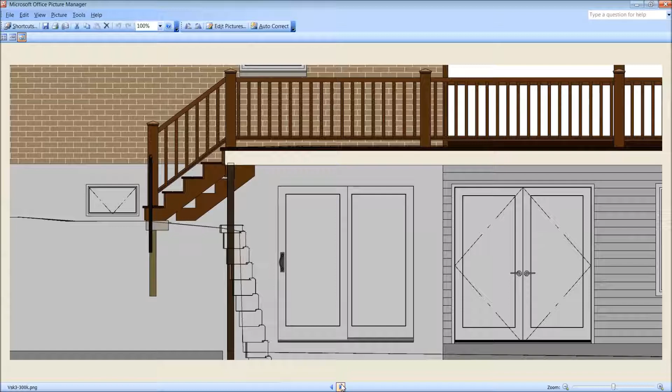But with the longer vanity, the 48-inch vanity, we ran into a problem. So the first thing I did was look at, can something happen to get that window in here? Really, it needs to move about 16 inches to make it possible. We need the stairs to move about 16 inches. It's doable. They can move over all the way there.

It becomes a little bit of a different environment underneath. It's doable because none of this isn't really going to be concrete here. All that concrete will be gone from the cut down. There will be some sort of coil stock or covering of the framing that's underneath, and there'll be a lintel above it to hold that brick up.

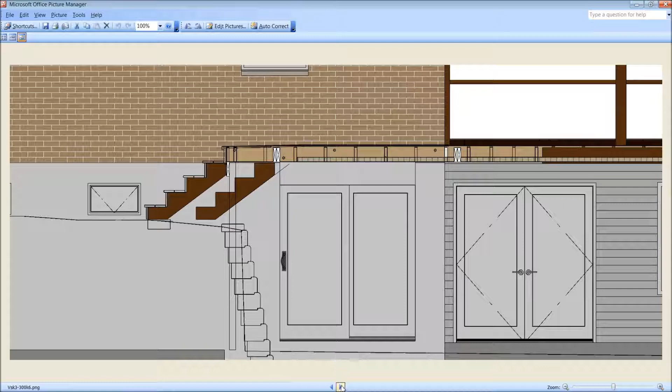So yeah, we could cantilever another beam. We've got a beam cantilever here to pick up the load from this column to there. So we could shift things around and send another cantilever beam through the floor and out to hold that up, and then the stairs come back here like that, and we can get a window into that room. The stairs come back, the sidewalk comes back with them.

However, before or after I did that, I said, okay, so it's doable in the event that the 5 foot or the 4 foot vanity is an absolute requirement. It is a doable thing without a terrible amount of headache. But first I wanted to see what could be done if we just left these stairs where they are, since that's all been set up already, and maybe if we can do something with this bathroom down here, we end up with a larger bedroom.

So that's the first thing I did, was took a look at what could be done with this bath here and keeping a window in place, keeping those stairs where they are. And we knew that the bed wasn't going to go on this side, it was going to go on this side like this.

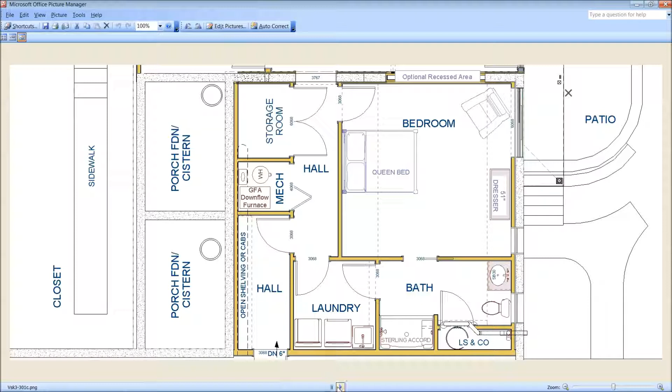So then to the bathroom, this was the best I could come up with while preserving that window space. You can see that wall actually shifts down a little south. So this was what I could come up with leaving this window in place, leaving the stairs in place. This is the arrangement I came up with up here with the closet here.

The closet becomes a little more narrow. I gave over some space for shelves or a linen cabinet back here in the laundry. I see no reason why the lift station can't fit in this space here. It fit in it before. It was really overdone, so I see no reason why it couldn't be there.

But it does, the largest vanity I can get in, because we've got a steel beam here and we want a little sink in the laundry room, the largest vanity I can get is 42, which is still a substantial vanity. The last one we looked at our last meeting was 48, so we lose 6 inches trading that off to leave these stairs where they are in place.

Leaving the window in place, and then this is the kind of floor plan we end up with. So the main decision is, can this bath floor plan work for you, and is this acceptable up here? And here's a closer up view of this little area.

I hadn't considered this at the time I did this review, but I'll put it together and stick it in here, then ignore it through the rest of the film. If you're willing to not have a full 5-foot wide shower, there are units out there only 54 inches wide, so you could pick up that 6 inches if you go down to a 54-inch wide shower. I'm showing this around 34 to 36 inches deep, but it can be a maximum of 44. So it turns out you can have the 48-inch vanity down here if you go with a shallower or less wide shower. I just wanted to put that in there so you know that fact exists, even though I don't mention it through the rest of the film.

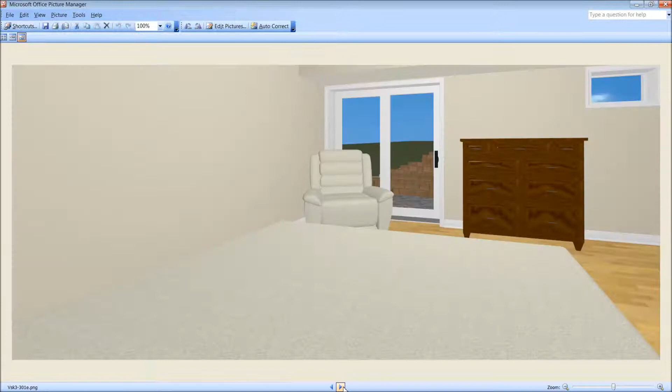Here are a couple of quick views: a person lying on the bed on this side, looking out the patio door, looking out the window. This doesn't get too encroaching. The window's not completely firmed up there, you can see I got an edge, but it actually gets bigger than that.

Anyway, I think this is a fairly decent plan. If you can get by with the 42-inch vanity, I think it's probably the way to go, so we don't have a bunch of horsing around here. This remains fairly straightforward.

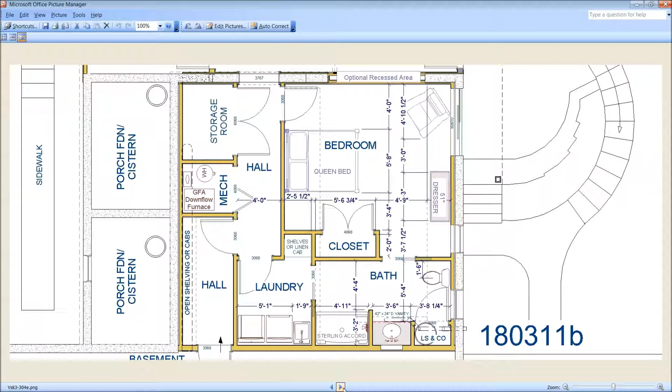The next thing that comes up with this particular plan, here it is dimensioned. I wanted to review with you, since we talked about having it fairly accessible with all 3-foot doors everywhere, we've got the 5-foot turning radius well within realm here, even once we shift this wall a little to make this door clear, so you don't have to pull the tank every time to get into this mechanical room. But in terms of fully complying with ADA guidelines, they're calling for a 42-inch towel bar or grab bar on the left side of the toilet, coming out at 56 inches.

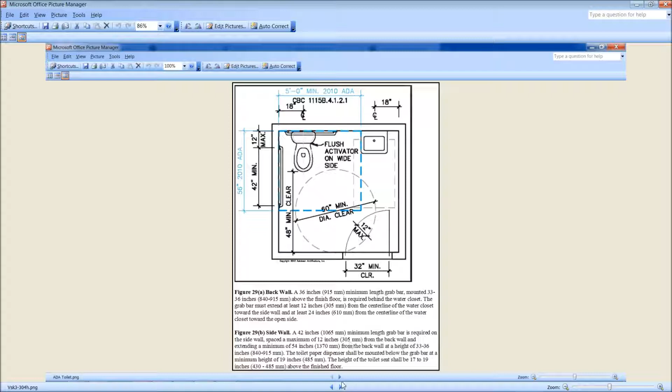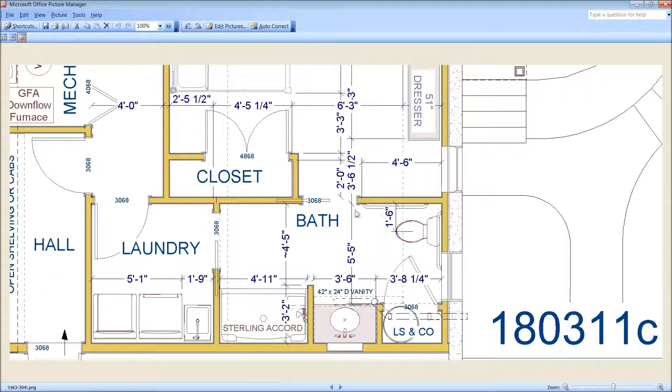You can see if we do that, it requires shifting this closet way back. You see how that is. To get this 42-inch ADA requirement for the grab bar, we've got to shift that closet door. I don't like that it comes under this soffit here, but if that's really critical, then that's what would have to happen. Whether this just gets divided with a little broom closet from this side, I don't like this door coming under this soffit like this. I don't like that detail, but if this is critical, that's the price to pay for keeping this window, keeping these stairs, and having this 42-inch grab bar on the left side of the toilet.

This is a little bigger overview. Just looking at these doors, something like this maybe would be better. Otherwise we leave it like it was, and you end up with about a 34-inch bar on the left side of the toilet, and you preserve the shelves and linen cabinet. You preserve this door, keeping it out from underneath that soffit environment. It's still a pretty decent bath.

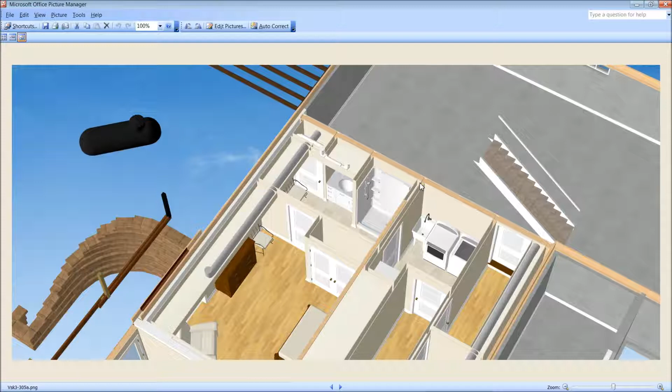Here's an overview of that particular bath. There's the closet, the door into the mechanical room, there's the 42-inch vanity, the shower is here. The shower head has to be on this side because this is a pocket door going back here. You can see a slight bit of that soffit intrudes into the shower, but it's nothing really. Here's another view from this side, showing the angle even with the little nightstands in place. From this side, the soffits aren't in place, so you can see all the piping, but if the soffits are there, it's something like this.

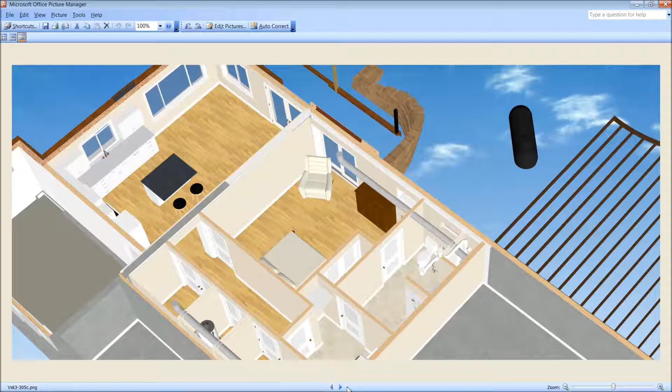I'm sorry to belabor this point, I just want to be thorough, and this is a fairly big undertaking. I want to make sure you have what you want at the end. So I want to revisit these stairs, and I really got carried away, so bear with me and try to stay with it.

This was the last, leaving all of this alone now, assuming this 42-inch vanity works. If you want the larger grab bar, the shift has to happen up here that we talked about. But returning to just the patio and the walls, you had liked these curved modular brick Allen block units coming around here, and this was where we had shown that, so I wanted to take a look at that.

I'm concerned about, or one of the things I want to review, is how quickly someone gets from up here down to down here, and the linkage between down here and up here.

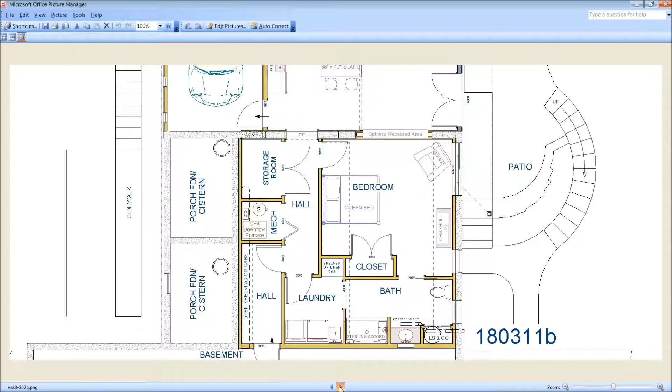At first I started just looking at this wall, and so, all things equal, I wondered if you weren't better with something like this. This bit here is the walls themselves, and then of course this is the stair. So I wondered if you wanted to think about something like this, whether that might work better. There's a bigger view of it here.

This is what we had looked at, and this is that one. It trims 2 or 3 feet off the travel path, but maybe it feels better down through here. I don't know, it's a personal judgment there.

And we are not finished with this whole area yet, sadly enough. But these were the two different looks I had at that time, at this point in my development. So this is what we looked at when I was there last Friday, and then this is the modification of that. Nothing much really, but something to consider.

And you would have, now I think that was the only rail that would be required—just the handrail, you wouldn't need a guard. All of the places where this becomes 30 inches high are going to be more than 3 feet from the walking path, so that's the only railing you would require. That was the only railing you were going to require here, was our belief.

But this is the next look, something like that. It's probably the same amount of Allen block, same amount of work, a little more stair forming, but they're already into a curve here. And whether those—that could be any number of things, it doesn't have to be concrete stairs.

So yeah, there's the required guard. Maybe that wall doesn't get so clogged up there and just comes back here, and you have potted geraniums or something in this corner. So this was what we looked at on Friday, and this is the modification of that.

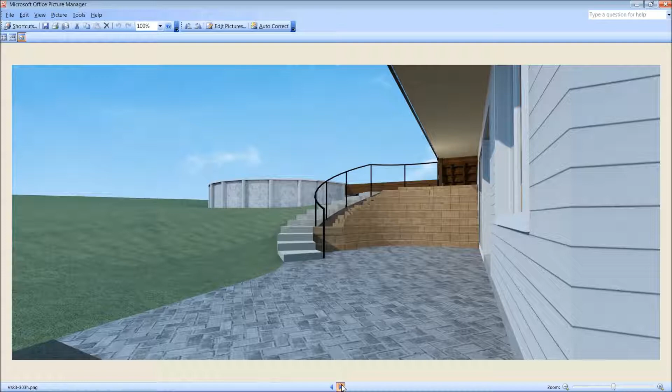Next, though, as promised, I was not finished with this whole area, because after I was out and met your mom, your mother-in-law, I began to wonder, not just for the immediate and foreseeable future, but for the long-term future, for the value of the estate, etc., whether we wanted to look at a better linkage between this outdoor area up here and the rear door and this lower living area here, which becomes a really viable apartment type environment.

So how close do we want to link this area with this upper area? I know that we have access in here through the stairs, etc., but I wanted to make sure we were set and sure on that once we got ready to put the money into this whole endeavor. So it was a case of do we want these stairs getting even more linked with this environment down here, so that there's a quicker path from either of these places up to this outdoor living space, up to this rear door out here, etc.

Originally I was thinking of just a little cute stairs curving down there. It wasn't really possible to do that, because if I get a stair down here, do we maintain a stair up here? This next review just looks at having one set of stairs going straight down to this patio environment as quickly as possible. So the first thing I did was look at that—what is the quickest, shortest pathway, which would be right up beside these stairs here.

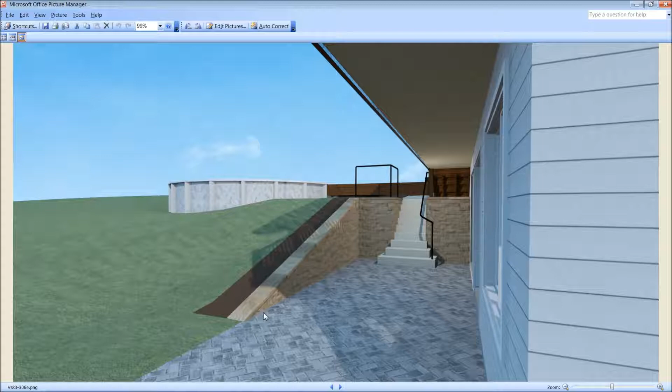So going this way and this way is the simplest type of stair down. This is probably, and these walls can still be that Allen block, for that matter. I mean, this comes out a little further when it's Allen block, but these could actually all be Allen block instead of concrete with veneer, cultured stone veneer.

I'm just showing it that way, and this is really a review of, do we want stairs right down to the patio? So it's something you have to think about and weigh your options and what matters, etc. And I know this is long and arduous, but it's a substantial investment, so you ought to have it right.

So that was the next simple stairs, and this is something like this. Absolute requirement of the handrail here. It actually could stop right here if you really didn't want handrails at all, but I think it's probably advisable to at least have it come down to the bottom of the stairs for the long-term future, etc.

Obviously, I don't show stairs out here, so the people are going to travel across this patio and then up these stairs in this permutation. There's some additional bars. I think that one's probably not required.

They say within 3 feet of the walking path, and this is probably closer to 3.5 or 4 feet to the edge. But considering the pathways here, I think it's probably advisable to at least have some sort of guards here. And those are not the 4-inch sphere guards, they're just enough to stop people, including toddlers, from coming off and over that edge. Whether that one is there or whether that comes all the way down, it's just personal, probably not required.

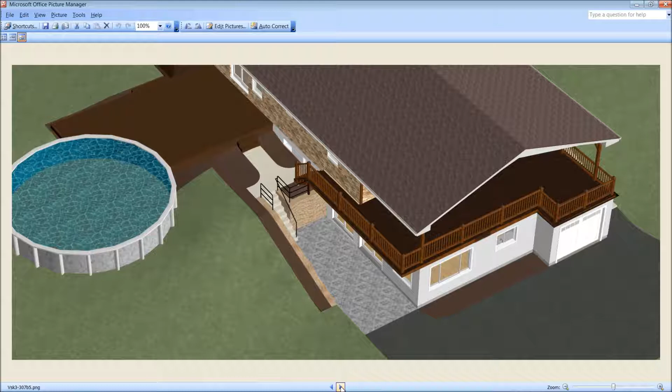And then here it is from down here with the bars in place. So that's the minimal kind of stairs to get down there.

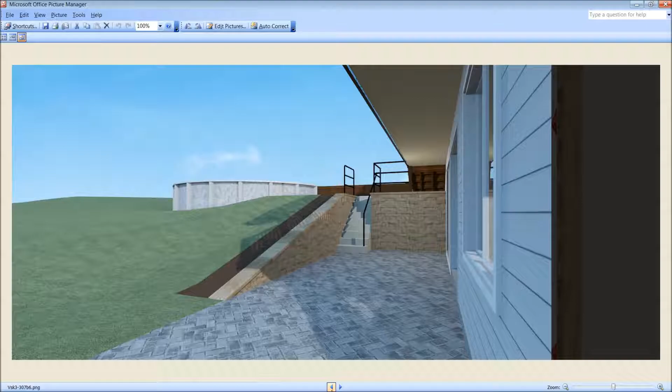Next though, as I said, not done yet. Next, I wanted to look at a little different thing, and really I built this after this next section, I just built this morning. But at first I had gone to a situation where you come down—I wanted to break up this 9 riser stair with a little flat section, but it really uses up a lot of the patio. I already put it together, though, so we'll continue to look at it all the way through.

So I put this together where you come down 7 steps across a landing and then down into a pedestal environment this way, where a person could get to it quickly, either from the car or from the door or from these doors. But you can see there's a little bit of a squeeze here if a car is parked there, and I have a feeling it might become a habit for someone.

So because that was so squeezy, I had something in mind when I started putting this together, and talked about it briefly at our last meeting. The first thing was to get rid of this pedestal type environment, so you can only enter from this end, as opposed to that short, simple stairs that came down right here, while travelers from this area are not cutting across her patio. If she wants to come up, she's got to come out here or out this door and then up. Still fairly straightforward.

Next, there are some retaining walls put along here because I have something in mind for getting a better view out here, for not having this big towering wall. So these are some additional retaining wall legs that come out here and hold the earth back on its way down, that slope down this way. And again, that squeeze by the car there is probably only 18 inches or something.

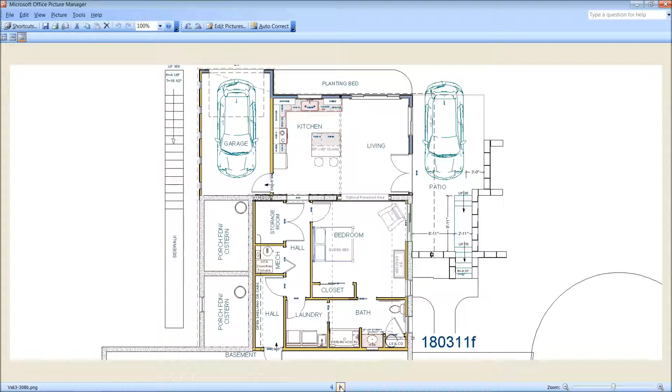Sorry to revisit this, but I want to make sure you know what you're getting and that you'll be satisfied down the road. So this is pulled back into a couple terraces, and now the view from this door, there are plantings up here. This wall here along the landing is 18 inches high, so it's actually a little seat, or there are potted geraniums - I'll stay with the stereotype.

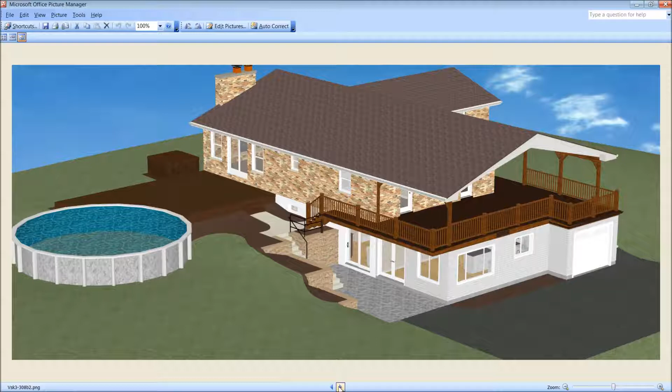And then this wall is pulled back some to allow for better parking here. I don't know what the expense is involved in this, as opposed to just the Allan block, where we had the Allan block wall here and a curve around here. I would just review all of this and see what appeals to you, and then we should probably draw what you would want ideally. If we have to break it back, then we have to break it back later.

But here it is from down here then, with these little 18-inch high walls here and here, and then planting areas here and here. Whether this bottom rail is there or not is really personal preference. You would require that much - I think that one's an absolute, regardless of what the code says. I think that one's an absolute.

This one, the fall is not too high for anyone really. This is only 30 inches here, so it's not required. It's actually not required here, so nothing is required - there's no handrail required on this whole side, because everything's kept within the code requirements.

Personally, I like this one. It's only 7 feet here, but it is isolated from that - that's really all I can say about it. Again, this could push out another foot if you thought that was a requirement. And that's it - finally, that is it.

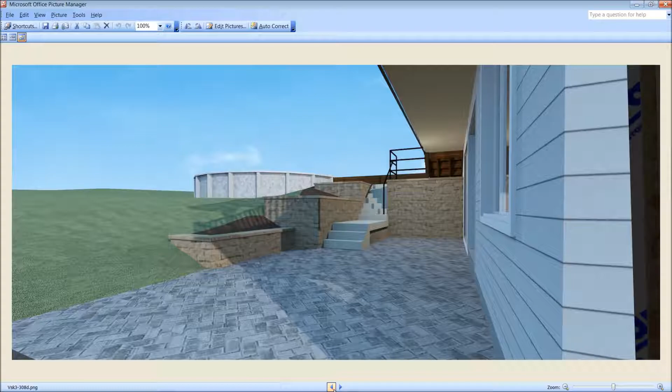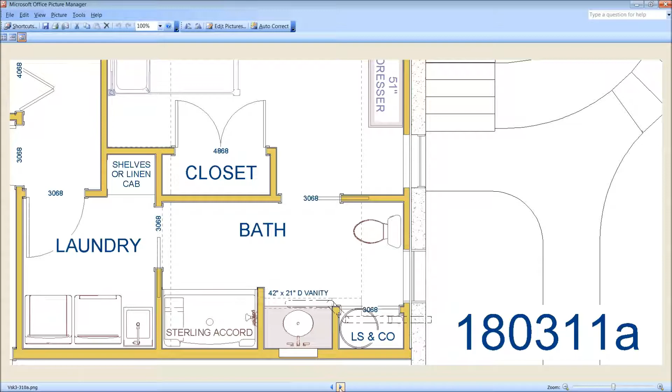I promise. So the only real decisions that need to be made are: can this bath work, whether with a smaller shower and a 48-inch vanity or the 42-inch vanity as shown; whether that 42-inch ADA-required grab bar in its ADA-specified location is required; and what sort of stairs and walls we have outside. I think that would do it. So if you let me know about those 3 or 4 decisions as quickly as is reasonable, I'll put together the plans and it'll be no problem at all. Thanks.